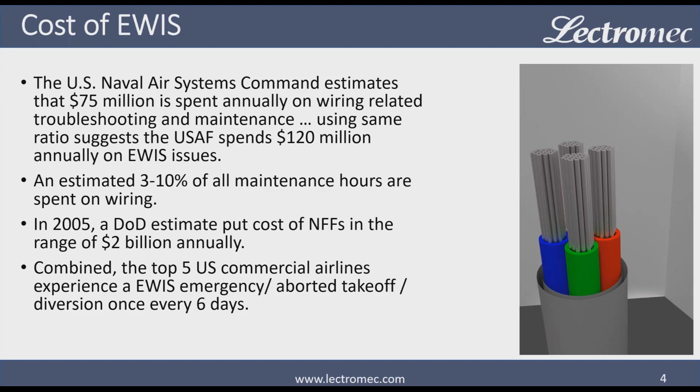Now, from a commercial perspective, the top 5 US commercial airlines experience an EWIS emergency, aborted takeoff, or diversion once every 6 days. If you want more information about that, we have a white paper on our homepage that describes how we came up with that figure. Certainly it's a good thing that it's so few, but obviously it's impacting commercial airlines on a regular basis.

So the how and why of EWIS service life extension, why this is an important thing, and why there's even a handbook behind this. Back in 2010, the Air Force identified that they had a glaring omission in their service life extension, because there was no guidance on the assessment of EWIS. They had procedures for structures, hydraulic lines, and various other aircraft systems and components, but really nothing for EWIS.

And what really happened was there was a 30-year-old fleet. It was wired with polyimide, or Kapton, if you prefer.

And they were going through their life extension, and they wanted to know, do we need to look at the EWIS? Is that really something that needs to be evaluated? So the fleet went to the folks over at the Air Force Research Lab and asked, well, is this something that you recommend we look at? Well, the Air Force Research Lab guys, these guys who have been there for decades and certainly had seen the changes in the importance of EWIS and know certainly the degradation of EWIS, and they were part of the TWA 800 incident investigation, and certainly a lot of investigations in the Air Force for crash investigations.

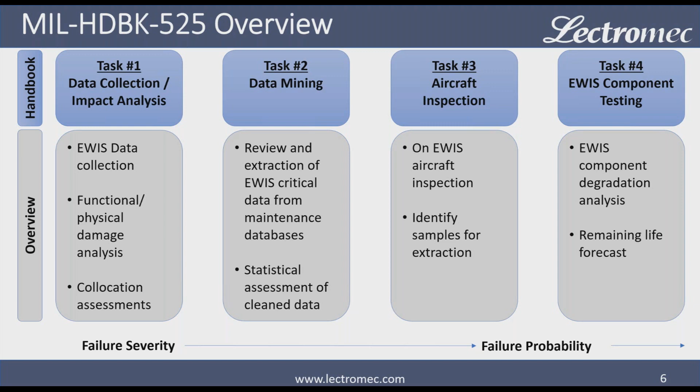At task 2 through task 4, you're trying to gather information about failure probability. In task 2, it's data mining, looking through maintenance data and really see what information you can glean from EWIS repairs and the reports that are there. In task 3, this is aircraft inspection, on-aircraft evaluation of EWIS. Task 4, this is where a lot more information about failure probability comes in: EWIS component degradation analysis and remaining life forecasts.

Task 5 of the MIL Handbook 525 is the risk assessment. This is where you take the information from task 1 through task 4 and bring it together to create a comprehensive EWIS risk assessment. And if you have enough information with regard to component degradation, then it's possible to predict future EWIS risk. And we'll talk about that when we get to that section.

Task 6 is an action plan. Obviously, everything here is designed to actually support the fleet. I know I say fleet, this is whether commercial or military. It's really applicable to both. But you're looking to develop a plan to really improve the maintainability and the reliability of the aircraft.

Last task is task 7. This is where you're progressively coming back and evaluating the condition of the aircraft and looking at what needs to be done to maintain airworthiness. And the rest of this presentation will kind of line up with each of these tasks because it's a logical way to do it. And a lot of the lessons we've learned fall into each of these buckets. So we'll go through that one by one.

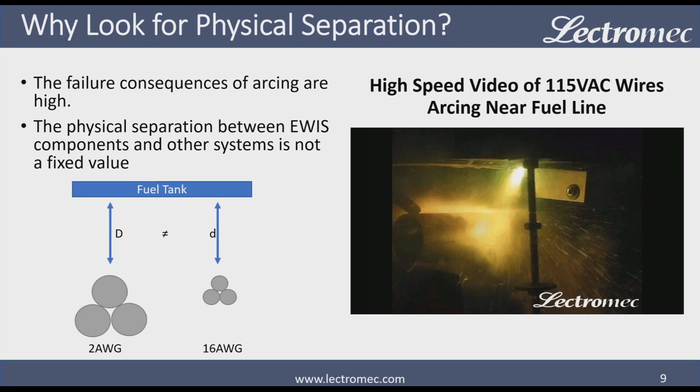So in task 1, we're looking to get physical failure impact, and that means trying to identify the separation between wire harnesses and critical aircraft components, fuel, hydraulic lines, etc. A lot of this information can come from drawings and just evaluating the 3D models if they exist. But for some of those areas which are high density or have had multiple changes, it's recommended that you go in and do an on-aircraft inspection. Now, you can't do this with every section within the aircraft, and that's one of the things that we certainly learned, that you need to really think about where you're looking and when you're looking.

And this overall process, the size and scope of it will vary based upon obviously the number of people available, the amount of resources, and certainly what's viewed as the importance of the program. And so to adjust the total number of areas to look at or the systems to be evaluated, you can focus on just the category 1 systems, or your systems that are related to catastrophic impacts. To limit the number of harnesses to evaluate, you can focus just on the larger power wires, things that are larger than 18 gauge. It's not ideal, but it helps to focus on some of those areas where the physical impact is very high. Certainly high density areas with wiring and pressurized lines, those are important, and without a doubt the co-location with anything fuel system related.

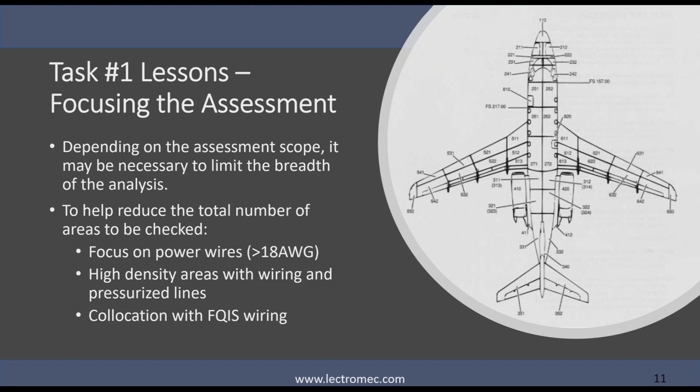Now, how much information you can get out from this Task 1 EWIS evaluation is dependent upon how deep you want to go into the EWIS. At the high level, a system level loss where you're really just looking at the criticality, your depth of analysis is very limited. But if you can start to bring in some of the circuit diagram information about how it's routed through the aircraft, then you can start doing the failure modes and effects analysis, co-location analysis, and depending upon the amount of data available, arc fault hazard analysis. Lastly, if you really follow everything that's recommended in terms of data gathering from the MIL Handbook 525, you can do a lot of analysis and really get a lot of information about the condition of the aircraft wiring system.

Now, this seems like a lot of information. This seems like a lot of data to churn through, but there are software tools available to help expedite EWIS assessment.

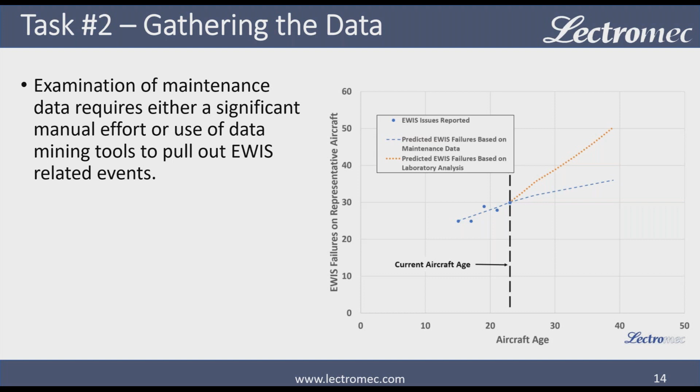Task 3, inspections. So the level of visual inspection is really dictated by two factors: the level of access to the area and the EWIS protection. Now, we know that there's not much space available on aircraft, and there's a lot of stuff crammed into those small spaces. So to get the most out of an EWIS inspection, it really needs to be aligned with heavy maintenance actions. I know that's sometimes a challenge because there's so much work going on, and any sort of inspection or analysis may impact that. But this is really the best time, and scheduling should be done during this time. It provides a lot more information and a lot more access to the aircraft. It's certainly areas of the aircraft that are not really available through most of its service life.

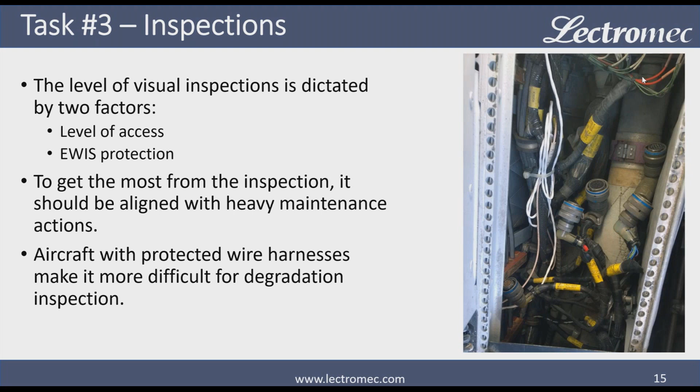Of course, as you see here in this figure, aircraft protected with additional harness protection are very difficult to evaluate. It's very hard to see any sort of degradation or damage to wires that are behind NOMEX or heat shrink tubing. And so in those cases, really the best thing you can do is look for the small sections that are exposed. See what you can glean from: is there any sort of overheating damage? Is there overwork? Can you see any sort of cracks in the top coat or the top layer of insulation? It requires an attention to detail, and when you're looking at a section like this, it requires a lot of patience, because if you're not focusing on trying to get that information, you can get very little from looking at an area like this.

Certainly, you hope that you don't look at sections of the aircraft that are as dirty as this, but it's going to happen. If the wiring is obstructed, it should be cleaned and inspected. If otherwise, what are you doing in the area? Information needs to be gathered as part of the overall process. And if you get in here and you actually do the cleaning and you look at the wiring and the components and the connectors and everything here, you get a lot more information. Anytime there's heat damage, it needs to be noted. That heat damage can impact the conductor, the insulation, any shielding.

And what you really need to keep in mind here is that if you're looking at a zone and you start to see some regular damage along the wire harness, see if it's maybe just an old clamp. We've actually had cases where clients have tried to figure out why there's been heat damage in a certain section of their wire harness, and it turns out it was just transfer from a clamp. So knowing what you're looking at is really something that we would recommend, and one of the lessons we've learned.

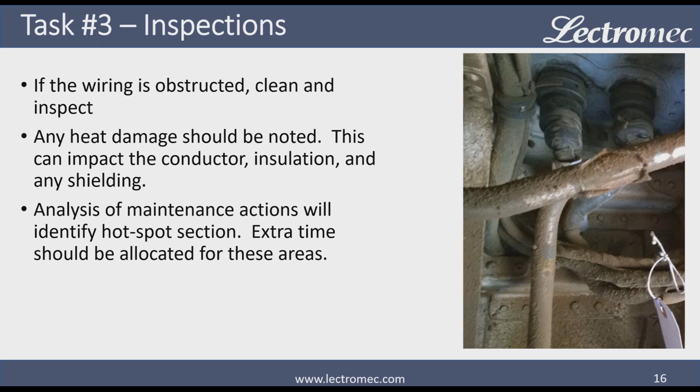Also, depending upon the size of the aircraft, you really can't look at every zone unless you have a large team devoted to going through it. To help reduce the total number of zones to be evaluated on the aircraft, use the information from Task 1 and Task 2 to help focus the effort. If Task 1 identifies that there is a section of the aircraft that has a high risk or high failure severity, focus on that area. If the Task 2 data analysis shows that there's another area that is low priority and never has shown a failure, that should be ignored, or have a very limited inspection.

So Task 4, remember, from Task 2 to Task 3, we're looking to try to get information about the health and the probability of failure within the EWIS. Task 4 looks at predicting the performance of the aging EWIS. And so for the EWIS components, the evaluation should be done in such a way to help with planning future maintenance actions. If you're looking at the components, really there's two ways to evaluate their performance.

There's a kind of a limited requalification, which looks at the condition of the component and compares it against the original performance. So if you take a wire, you'd say, here's the insulation resistance when it was new, and here's where it is at this point in its service life. Now this is great. You don't need in-depth knowledge of the component. You don't need to know how the component materials degrade over time. And it does provide some information about the component performance.

The problem with this approach, though, is that it cannot provide data for future projections. If all you know is where it is and where it was, but you don't know how it will progress over time, then you're limited to the here and now. Another way to look at components is to perform a degradation assessment. Obviously, the positive here is that you can use this information to predict future performance and reliability. The results can be correlated with performance criteria.

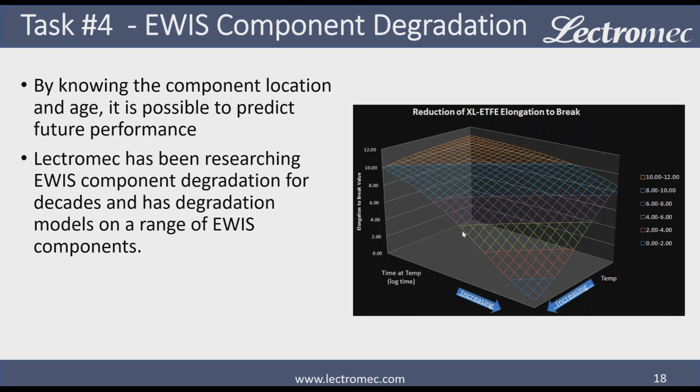If you use this, then you can say, okay, if we can plan 5, 10, 15 years out, and we know how the degradation of our EWIS components will evolve, then we can start getting things in place. We can say, if we need to replace it in 10 years, we need to start getting funding at year 5. We can start getting those components ready in year 7, and then when that aircraft comes in for service in year 9, everything is ready, we can make the hot swap, and it's good to go.

So this is something that we've been working on for decades, and we cover a wide variety of EWIS component degradation with our research. Now, things that can impact its performance. Predicting performance is really dependent upon knowing where stuff comes from, knowing some of the history, because like a lot of things in this world, if you put garbage in, you get garbage out. So it's necessary to know the condition or the history of that component.

As an example, I've had a couple clients over the last decade who have been doing some rewiring on their aircraft. They basically took the wire, dumped it all into a box, and at some point they said, hey, we should probably figure out the condition of this wiring to see if we can help the other aircraft in this fleet. So they sent it to us, we did the evaluation, and the results really didn't match our expectations.

And so we wanted to find out more and asked the client, can you tell us how old these wires are, and do you know exactly where they came from? And unfortunately, they could not. All of the identification for those wires had been stripped. It was just thrown into a box of wires that come from roughly 4 different areas within the aircraft.

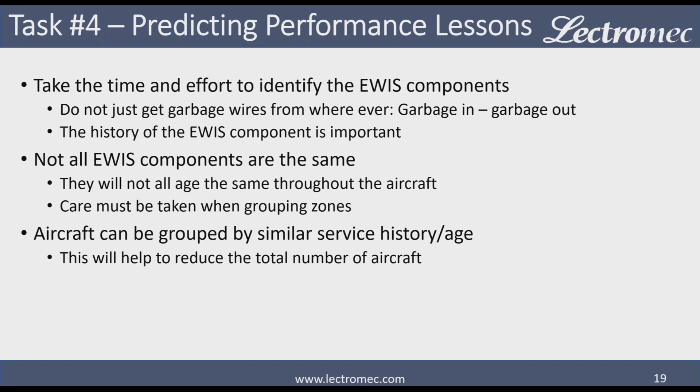Last point with regard to task 4, aircraft can be grouped together by similar service histories and age. This obviously can help to reduce the number of aircraft that need to be evaluated. I mean, if you have a fleet and you look at just a couple aircraft, look at the ones that are potentially different, have different service histories, and that can certainly provide a good scope and actually a good view into the condition across the entire fleet.

Task 4, last item on this one is if you look at the condition, you actually can predict forward, which is one of the things that I think Lectromec does a great job at. You can start to predict, you can start to look at when you need to get things replaced. And I kind of touched on this a couple slides ago, and I got ahead of myself, but from an actual visual perspective, you can see here we have a best and worst case condition.

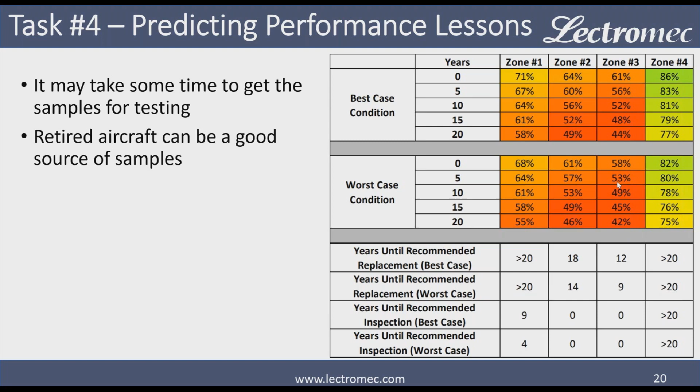And for this EWIS component group, we would say that the 50% mark is where the performance degrades to such a level that the reliability is no longer there, where you're going to start seeing age-related failures. So in the best case for our zone 3, we say that would be around year 12, and for our worst case around year 9. And as I mentioned earlier, this allows for prediction and a means to get ahead of maintenance actions before it starts impacting aircraft reliability.

Task 5, this is where everything comes together. This is where you do bring together the severity of failure, which was identified in task 1, and the probability of failure information that was brought in from task 2 through task 4. And the idea here is that if you can get an aircraft and you can break down the zones to identify which areas have the highest risk of EWIS failure and highest risk from the EWIS, you can then focus your maintenance to the areas that have really the best impact.

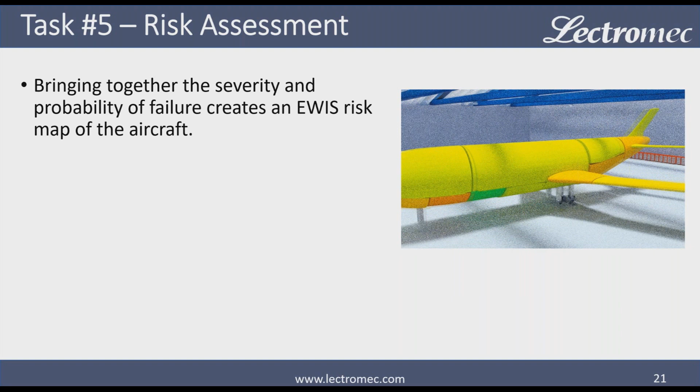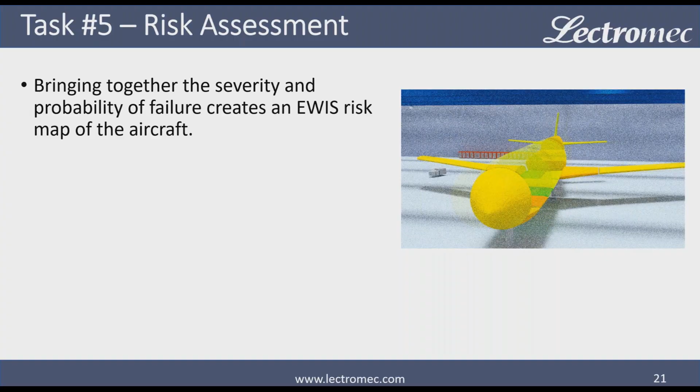If you can reduce the maintenance in certain areas, then obviously you can put that time into the more critical areas and potentially save time and money. Of course, if the entire aircraft is in terrible condition, which is something we've never seen happen, then it may be beneficial to increase maintenance actions until performance has improved.

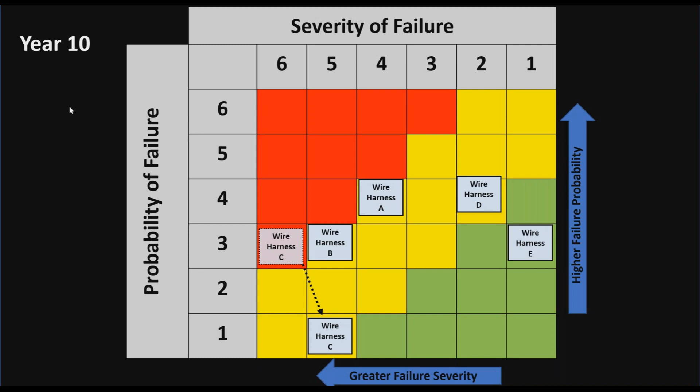Task 6 is where you take action, and really for any EWIS program, any sort of life extension, there are 4 actions that can be taken. First, no actions are necessary. The analysis finds that the wire harness is in perfect condition and no further actions are necessary. This would be a great case. This would be wonderful if wire never degraded and EWIS components never had any sort of age degradation. But we know better. We know that these components will degrade over time. And that doesn't mean to say that you won't find an aircraft that needs no actions. We've certainly, through our analysis, found several fleets that have been in good condition where no additional maintenance or changes have been needed.

The next thing that could be done is increase or modify maintenance actions. Certainly the analysis could find some areas where the degradation is very high, and additional maintenance could potentially extend the life of those components, or at least ensure that if there is any degradation, if there's any increase in the number of failures, they're handled either shortly before or shortly after they actually appear.

Next action, a wire harness replacement. Now, this is obviously not ideal for many fleets, but sometimes it's necessary. But as I said earlier, there's never been a case where we've worked on a fleet and found that all the wiring or EWIS components need to be replaced. We can focus on those areas that have high degradation and restore the aircraft wire system reliability just by replacing some of those wiring harnesses.

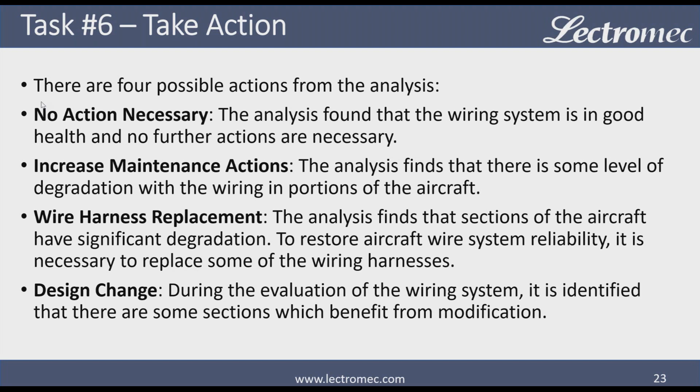And lastly, risk is a combination of probability of failure and severity of failure. A full EWIS assessment can address both and provide the data necessary for planning future maintenance actions. So if that's all you take away from this webinar, I will be a happy man.